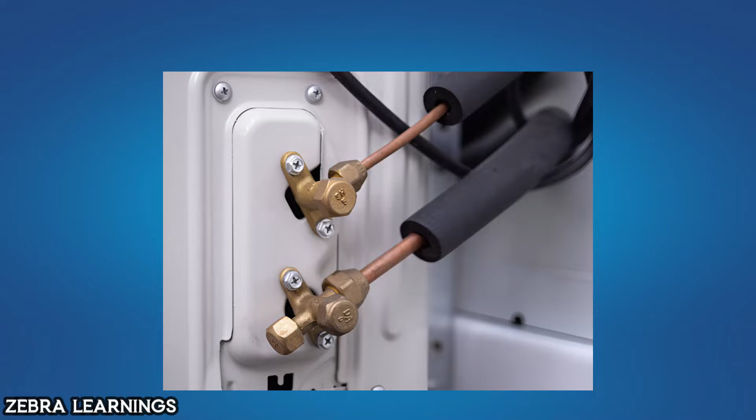In this video, we are going to learn about the service valve that is present in an AC unit. This service valve is a very important part in an AC unit. It's very likely that they'll ask about the three positions of this during the interview.

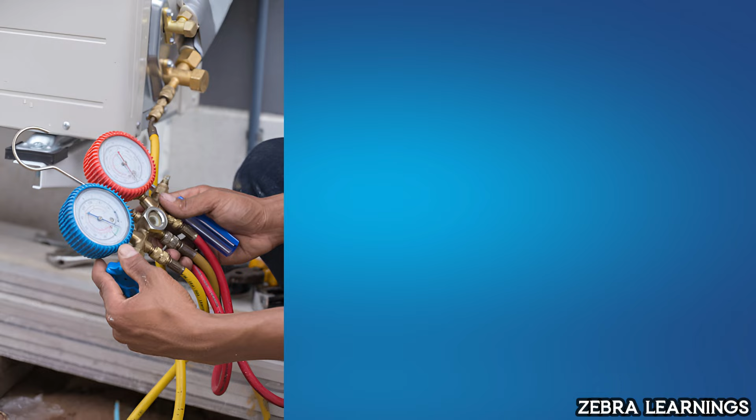Through the service valve, we perform various tasks on an AC unit, such as refrigerant charging, recovery, vacuuming, and pressure checking. Commonly, both standard service valves and three-way service valves are used in split AC units. The standard service valve, connected to the liquid line, has two ports. These ports connect to both the outdoor and indoor units.

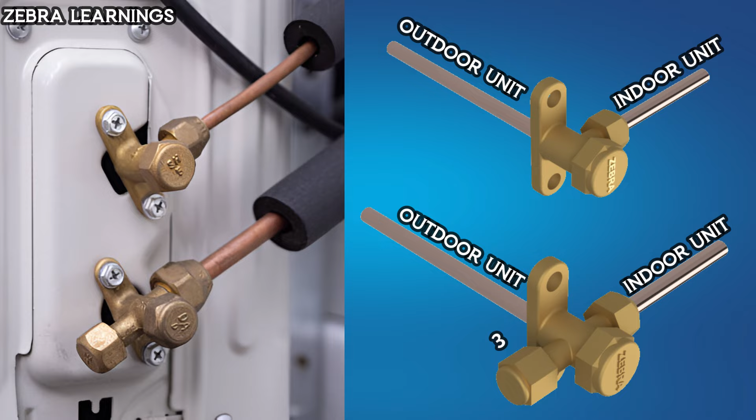The three-way service valve, connected to the suction line, has three ports. One port connects to the outdoor unit, another to the indoor unit, and the third port is used to connect a gauge or other service equipment. The service valve can be in three positions: front-seated, back-seated, and mid-seated.

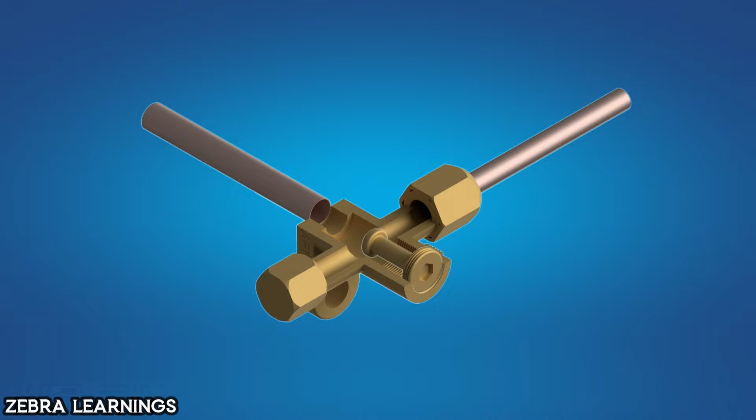There's a stem in the service valve that can be opened or closed using a hexagonal key. The position where this stem is fully closed is known as the front-seated position. When the valve is closed in this manner, the stem completely closes off the port to the outdoor unit. At this point, only the port to the indoor unit and the port for connecting a gauge remain open.

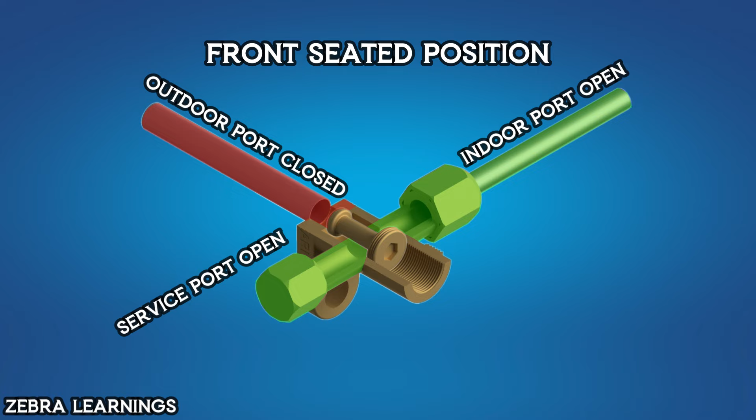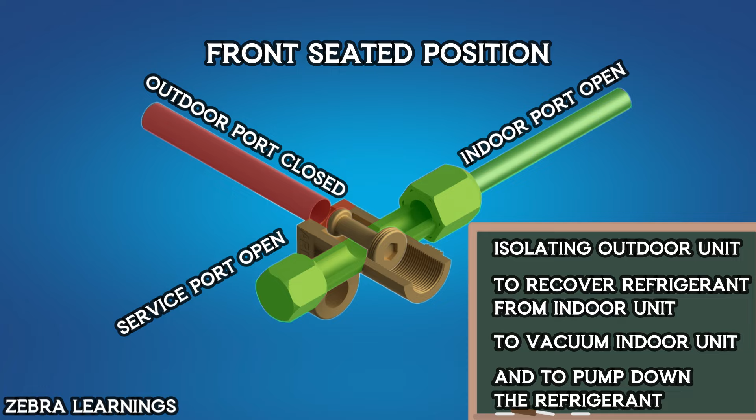The front-seated position is used for isolating the outdoor unit, recovering refrigerant only from the indoor unit, vacuuming the indoor unit, and pumping down the refrigerant in the outdoor unit when moving it to a different location. The position where the stem is fully open is called the back-seated position.

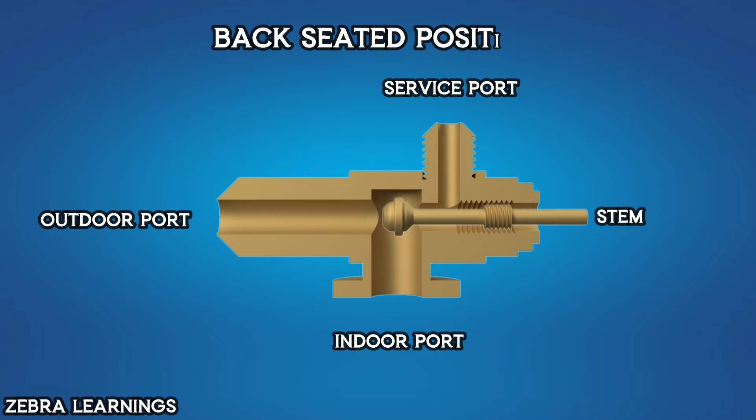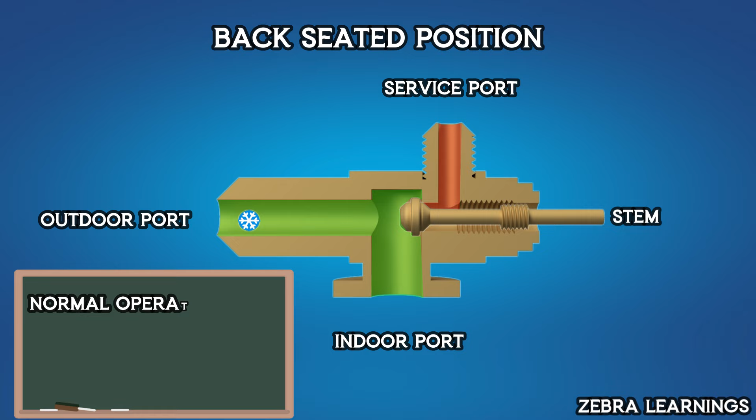In the previously used service valves, when the stem was in the back-seated position, the indoor and outdoor ports were open, and the service port for connecting a gauge was completely closed. The service valve is positioned in this way for normal operation of the air conditioning unit. This ensures that there is no significant refrigerant leak from the service port, allowing the unit to run normally.

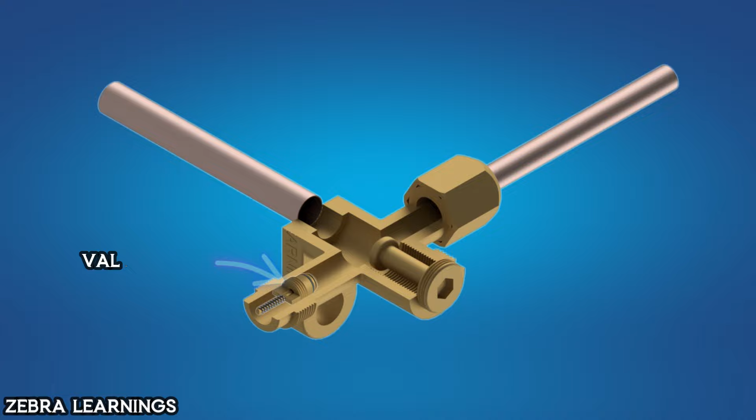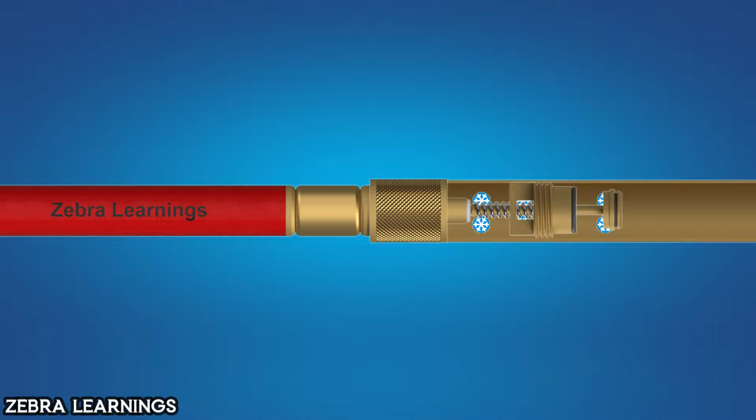However, modern service valves have a valve core in the service port. This valve core is operated by a spring force. When we connect a gauge to the service port, the pin in the gauge pushes the pin in the valve core. This action opens the head of the valve core, allowing the refrigerant to flow freely.

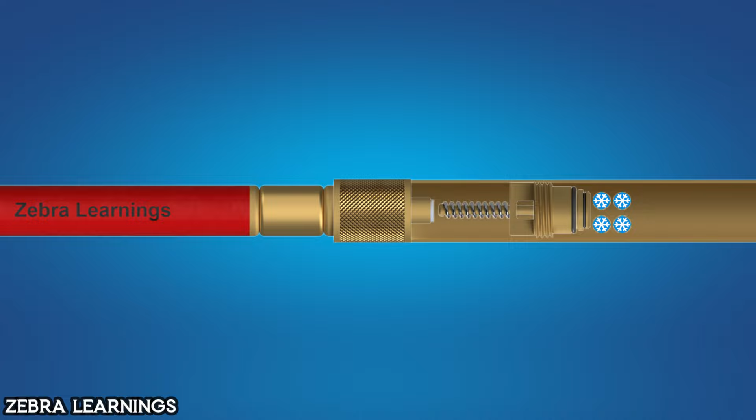When the gauge is removed, the spring force returns the head of the valve core to its original position, closing it. This prevents the refrigerant from flowing. In the modern service valves we use, even when the stem is in the back-seated position or front-seated position, the service port remains closed.

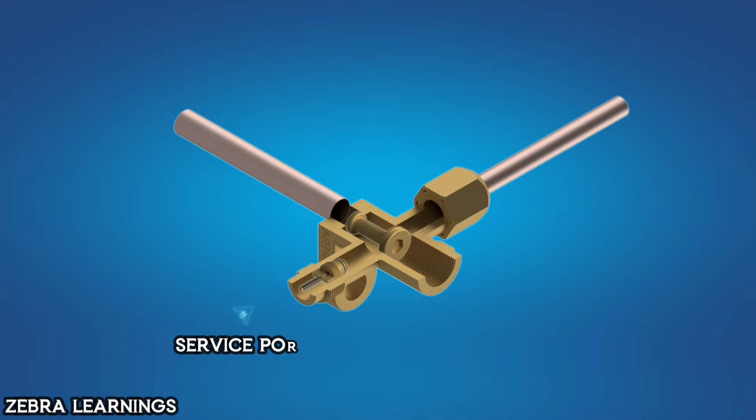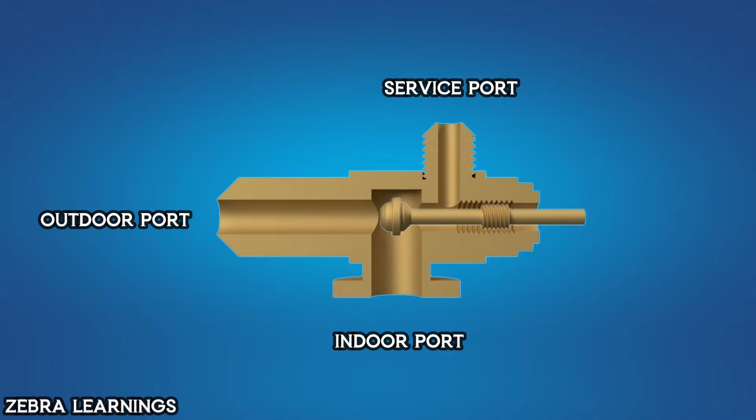The mid-seated position refers to when the stem is in the middle position. This method was used to charge and recover refrigerant. When the stem is in the middle position, all three ports, indoor, outdoor, and service, are open.

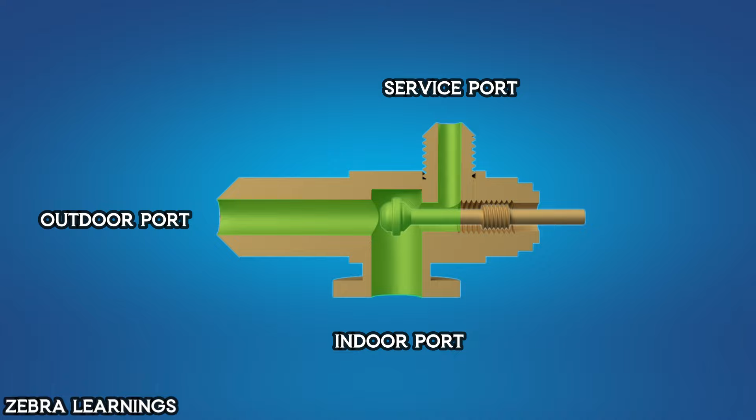Technicians use this service port to charge or recover refrigerant. Once the work is complete, they change the position of the stem to the back-seated position for normal operation. However, in the service valves we use today, the mid-seated position is no longer necessary.

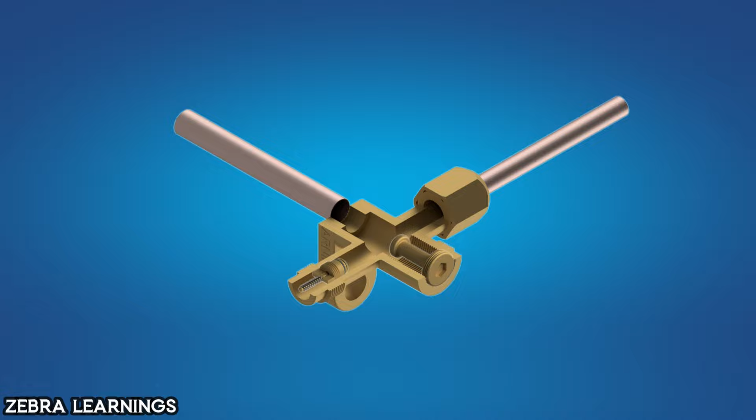A standard service valve typically has two positions: front-seated and back-seated. The back-seated position is the normal operating position for an AC unit. When the AC unit is running normally, the service valve is in this position, allowing refrigerant to flow between the indoor and outdoor units. The front-seated position completely stops the flow of refrigerant.

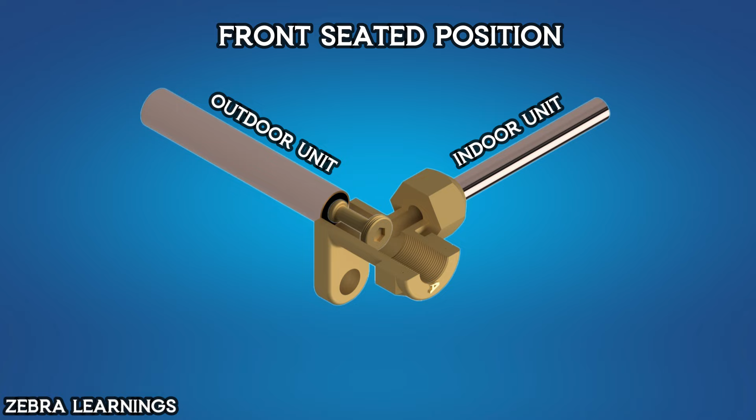This position is used to isolate the outdoor unit. When moving the outdoor unit to a different location, all the refrigerant is pumped down, and then the service valve is placed in this position before moving it. That was an explanation of the AC unit service valve.